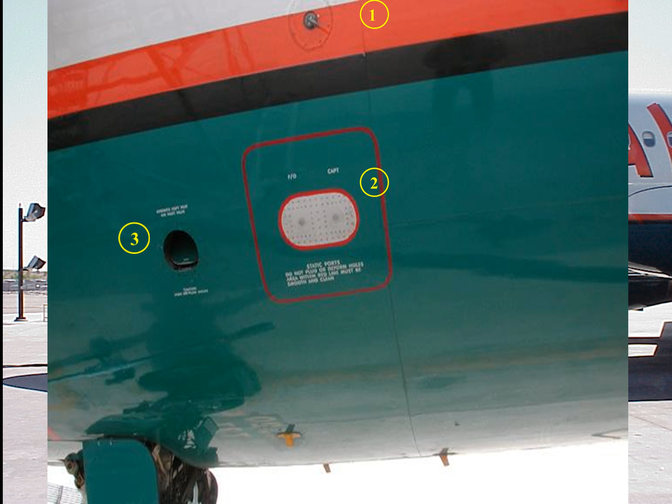One. AOA probes. Checked. Probes should be uncovered and damage-free. Captain and FO static ports.

Checked. Static ports should be clean and free of obstructions. Avionics ventilation air inlet valve. Checked. Door should be open and unobstructed if outside air temperature is greater than ground threshold 35 degrees to 55 degrees Fahrenheit. Otherwise, door should be flush with aircraft.

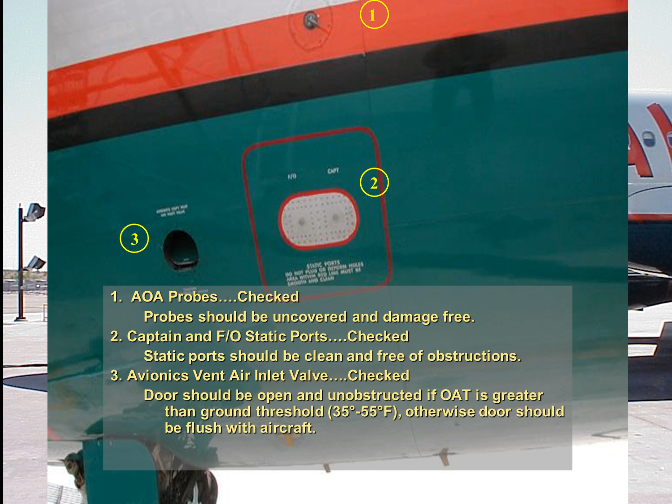Two. Oxygen bay door. Closed. Door should be closed and latched. Oxygen pressure relief disc. Checked. Check that the green disc is in place.

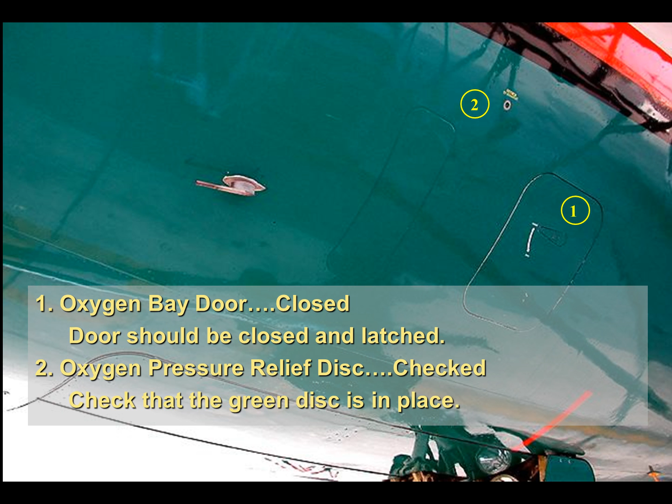Three. Pitot probes. Checked. Probes should be uncovered and damage-free. Total air temperature probes. Checked. Probes should be uncovered and damage-free.

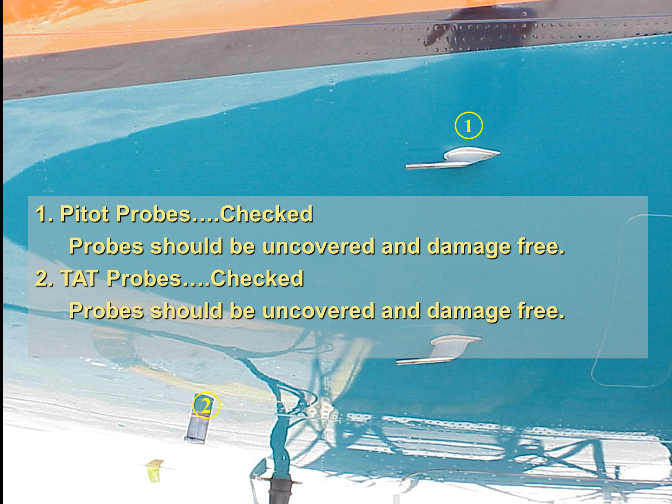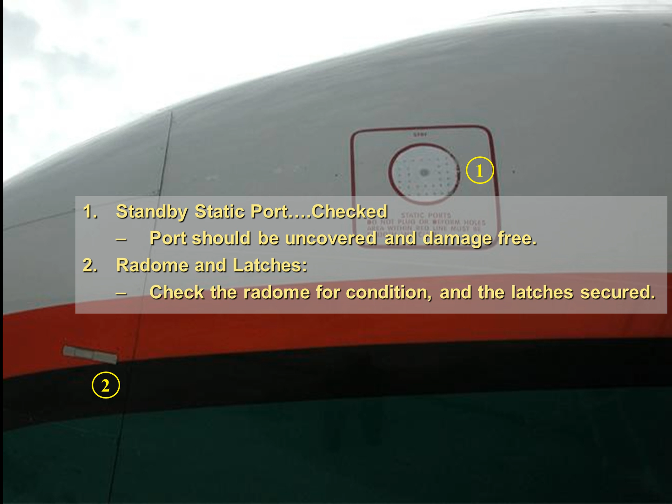Four. Standby static port. Checked. Port should be uncovered and damage-free. Radome and latches. Check the radome for condition, and the latches secured.

Five. DME number 1 antenna. Checked. Check condition and security. Nose avionics compartment door. Closed. The door should be closed and latched. External power door. Checked. Door should be secured if ground power is unavailable.

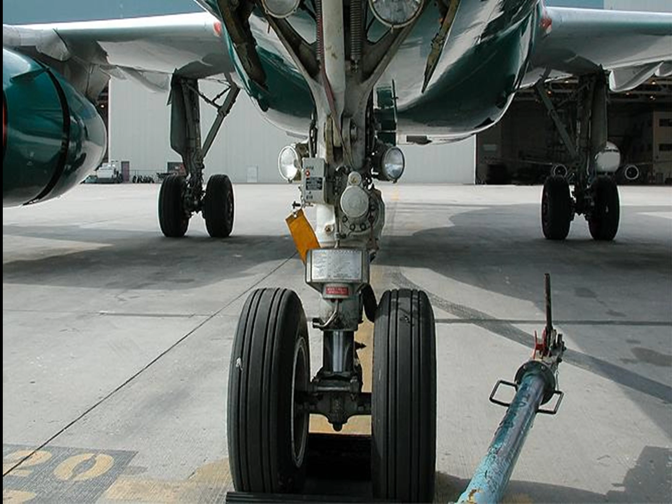Six. Chocks. In place. Brakes should be set if the airplane is unchocked. Wheels and tires. Checked. Check wheels and tires for condition. Although fabric may show, if tire cord is visible, contact maintenance. Taxi, takeoff lights. Checked. Check lenses for general condition and cleanliness.

Nose gear structure. Checked. Check for adequate strut inflation, general condition. There should be no apparent leaks. Runway turn-off lights. Checked. Check lenses for general condition and cleanliness.

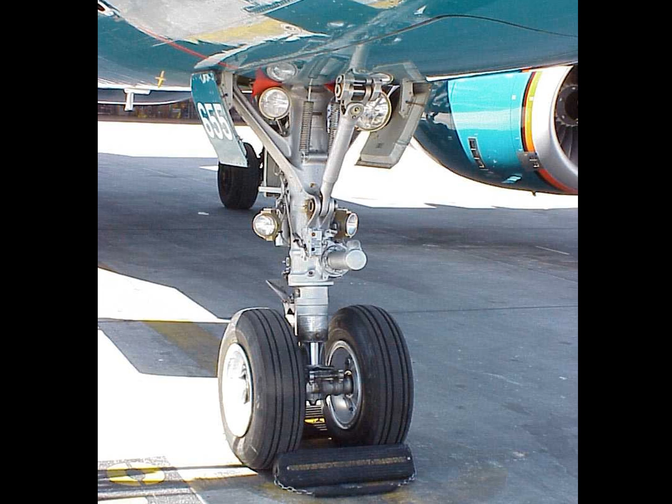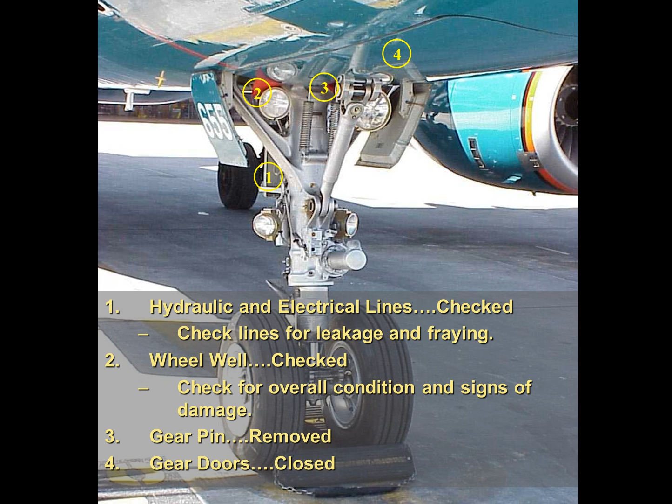Seven. Hydraulic and electrical lines. Checked. Check lines for leakage and fraying. Wheel well. Checked. Check for overall condition and signs of damage. Gear pin. Removed. Gear doors. Closed.

Eight. Forward avionics compartment door. Closed. Door should be closed and latched. Avionics ventilation air outlet valve. Checked. Door may be open or closed based on skin temperature threshold, same as the avionics ventilation inlet valve.

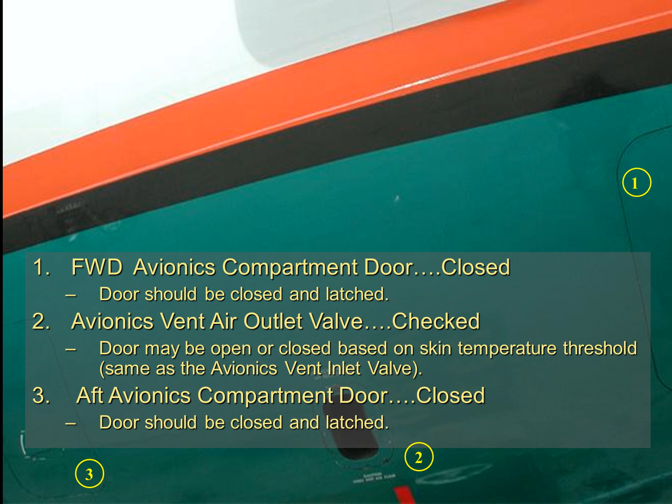Door should be open and unobstructed if outside air temperature is greater than ground threshold 35 degrees to 55 degrees Fahrenheit. Otherwise, door should be flush with aircraft. Aft avionics compartment door. Closed. Door should be closed and latched.

Nine. FO and captain static ports. Checked. Static ports should be clean and free of obstructions. Forward cargo door. Checked. If door is closed, handle should be flush with the door and the locking indicators showing green.

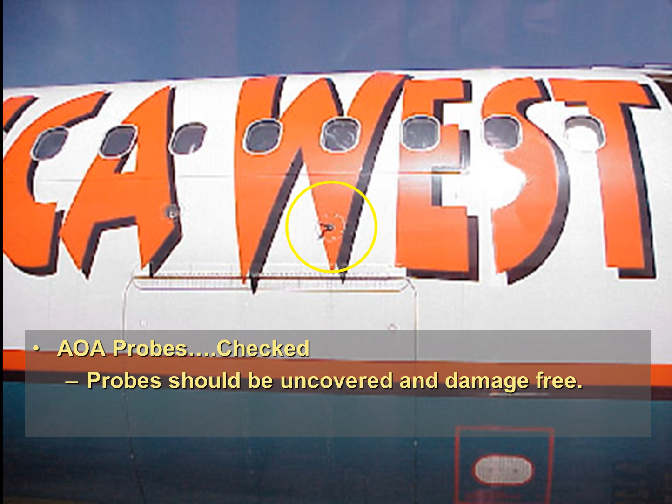Ten. AOA probes. Checked. Probes should be uncovered and damage-free.

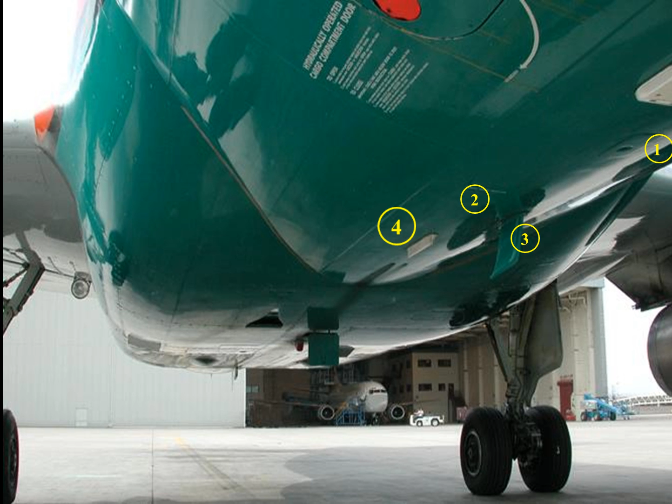Eleven. Antennas. Checked. Check condition and security of the transponders, and number 1 and number 2 DME antennas. Cargo door selector panel. Closed. Lavatory drain mast. Checked. Check the drain mast for damage and obstructions. Marker beacon antenna. Checked. Check condition and security.

Twelve. Emergency ram air inlet flap. Checked. High pressure ground connection door. Closed. The doors should be closed and latched. Low pressure conditioned air door. Closed. The door should be closed and latched.

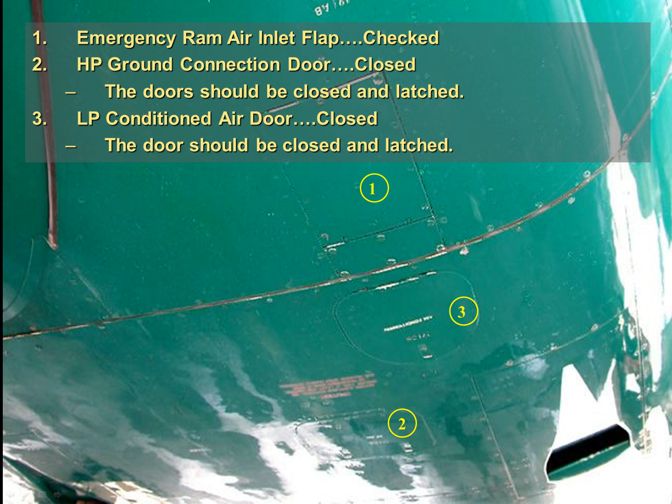Thirteen. Potable water drain door. Closed. Door should be closed and latched. Pack air intakes. Checked. Intakes should not be obstructed. Beacon light. Checked. Check that the light is flashing and that the lens is clean and damage-free. Overpressure panels. Secured.

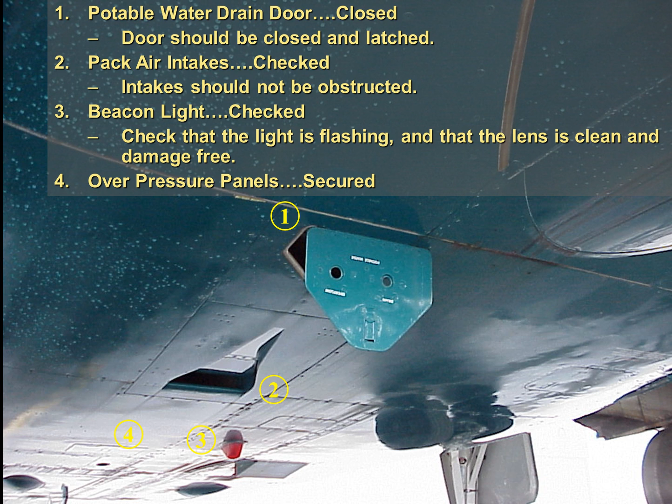Fourteen. Center fuel tank magnetic fuel level. Secured. The stick should be secure and flush with the fuselage. Center fuel tank leak monitor valve. Checked. Check for signs of leakage.

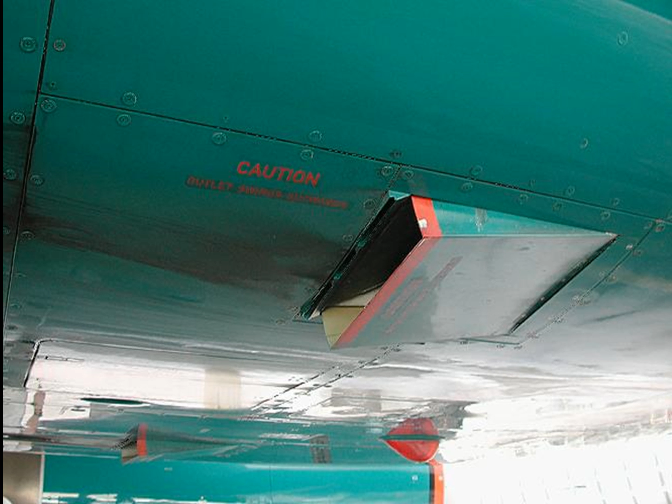Fifteen. Yellow hydraulic bay door. Closed. The door should be closed and latched. Pack air outlets. Checked. Outlets should not be obstructed.

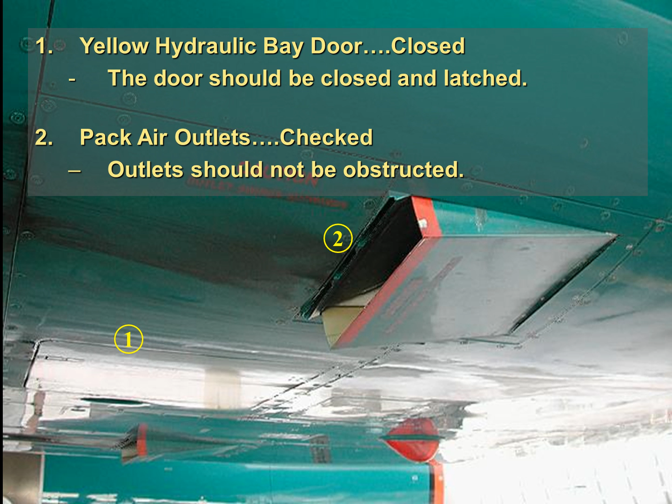Sixteen. Refueling control panel. Closed. The door should be closed and latched if not in use. Magnetic fuel level and water drain valve. Secured and checked. The sticks should be secure and flush with the wing. Check for signs of leakage. Landing light. Checked. The light should be retracted and the lens clean and undamaged.

Leading edge slat number 1. Checked. The slat should be retracted and free from damage or contamination.

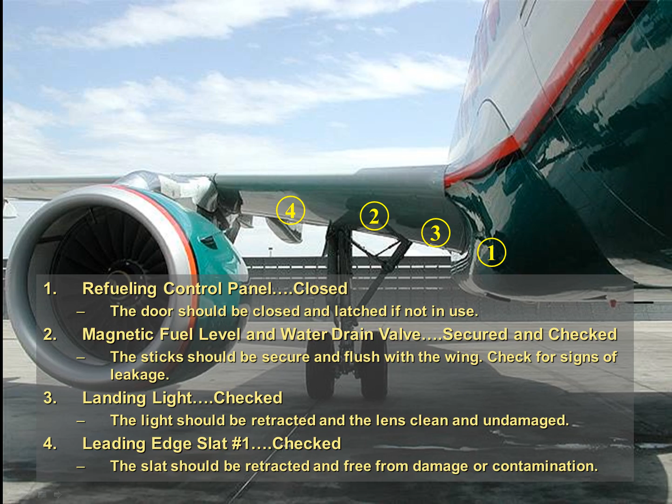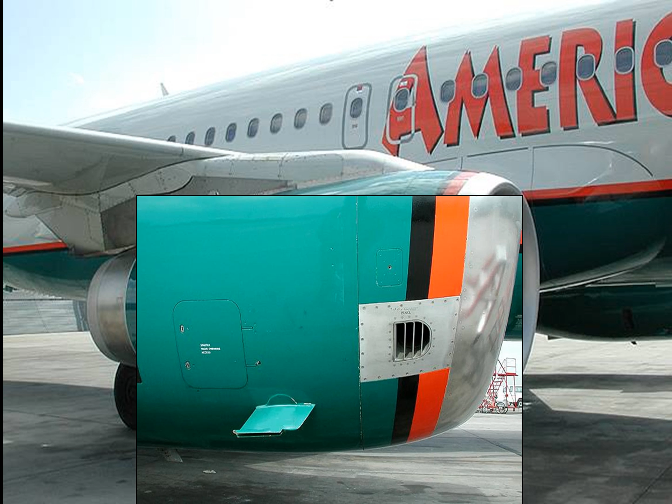19. Start valve access door. Closed. The door should be closed and locked. Engine pylon and access panel. Checked. Check the pylon for damage. The access panel should be closed and secured.

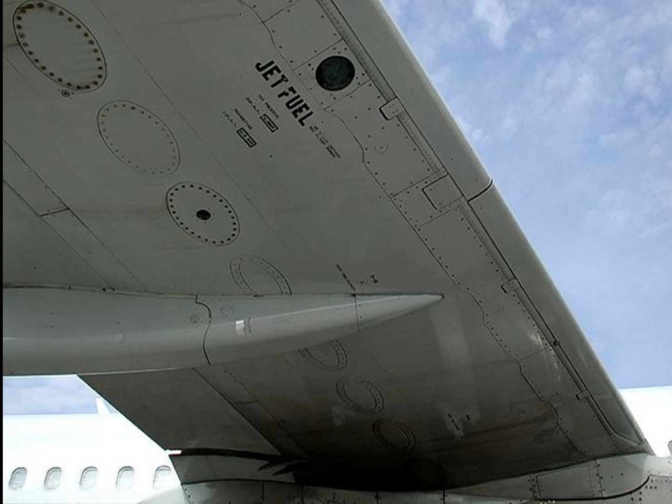20. Single point refueling cap. Closed. Cap should be secured if not in use. Wing tank overpressure indicator. Checked. Check the black disc with a white cross visible.

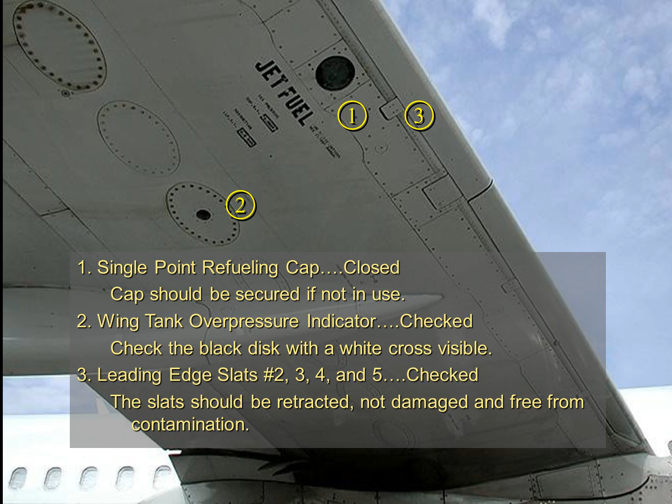Leading edge slats number 2, 3, 4, and 5. Checked. The slats should be retracted, not damaged and free from contamination.

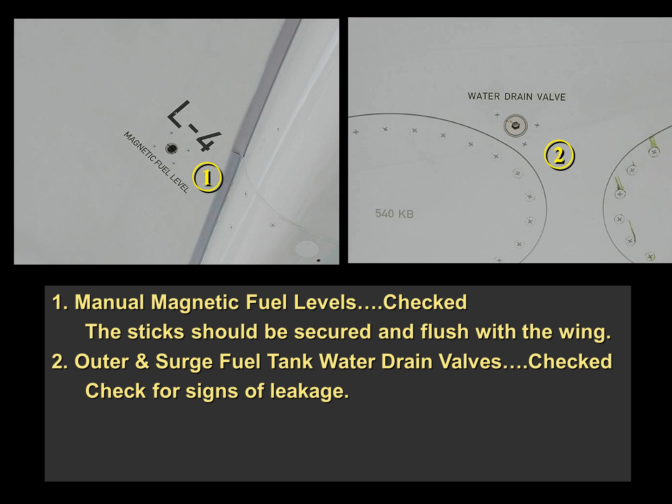21. Manual magnetic fuel levels. Checked. The sticks should be secured and flush with the wing. Outer and surge fuel tank water drain valves. Checked. Check for signs of leakage.

22. Surge tank air inlet NACA port. Checked. The inlet should not be obstructed. Surge tank overpressure indicator. Checked. Check the black disc with a white cross visible.

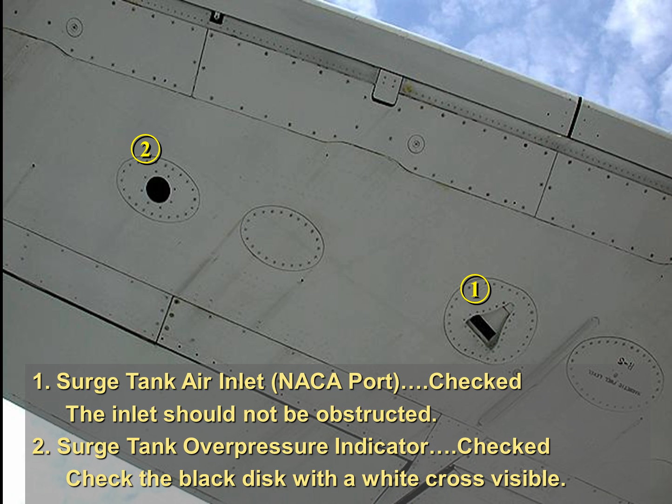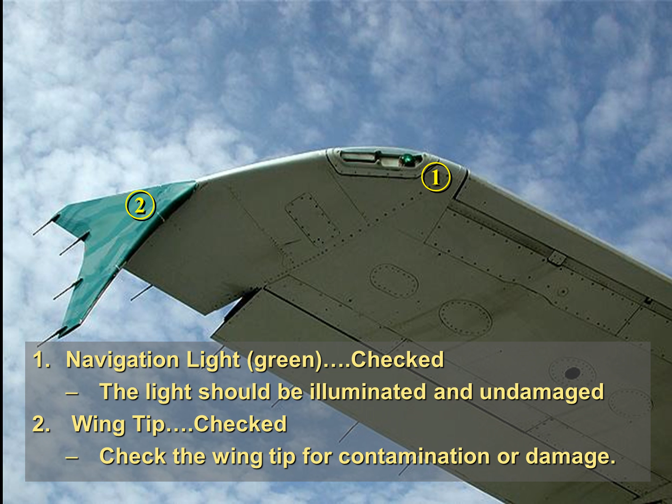23. Navigation light green. Checked. The light should be illuminated and undamaged. Wingtip. Checked. Check the wingtip for contamination or damage.

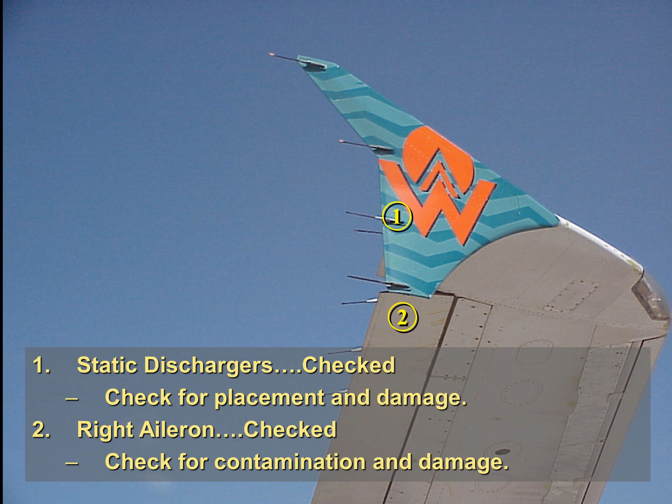24. Static dischargers. Checked. Check for placement and damage. Right aileron. Checked. Check for contamination and damage.

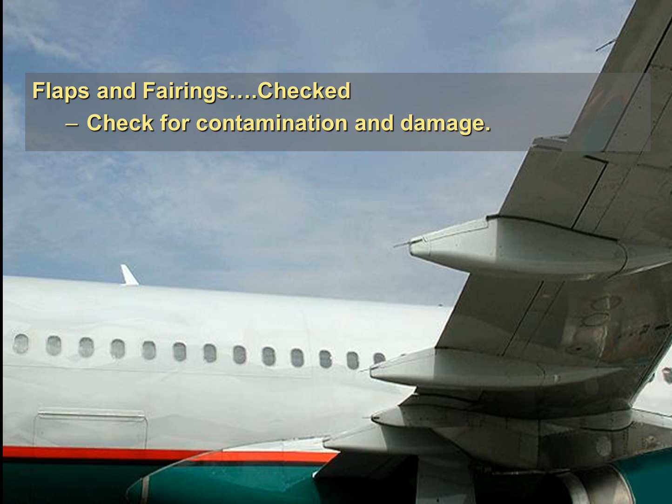25. Flaps and fairings. Checked. Check for contamination and damage.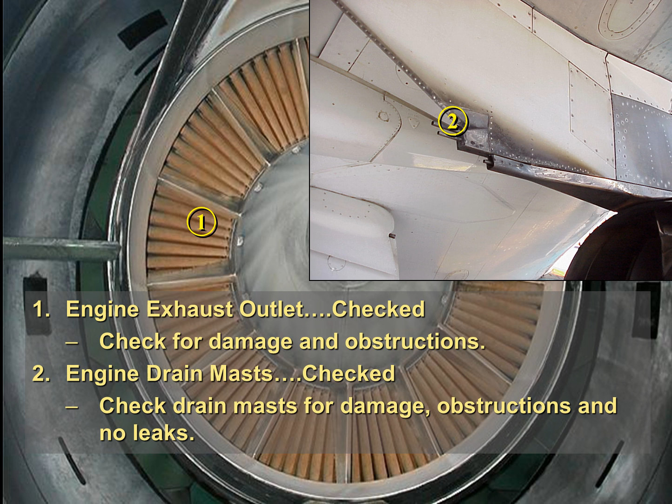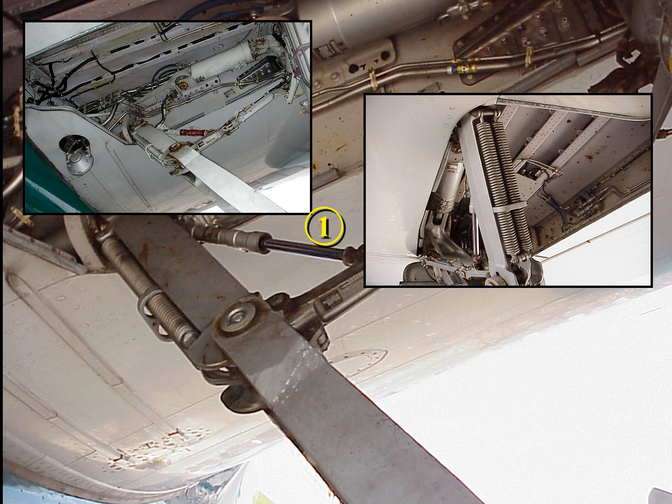28. Gear downlock. Removed. Downlock spring. Checked. Check for apparent damage.

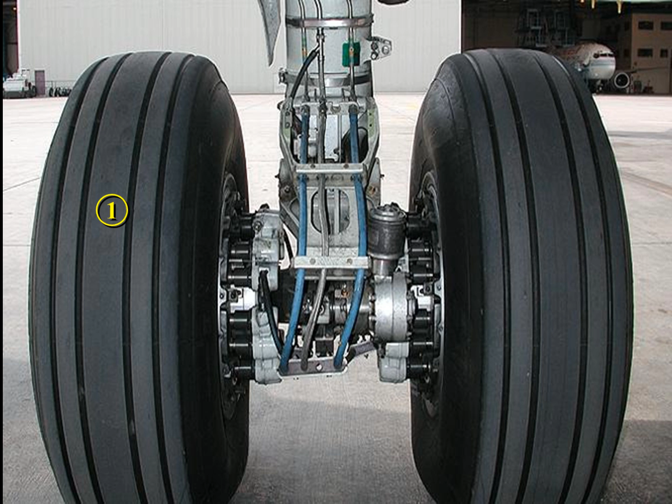29. Strut, tires and wheels. Checked. Check strut for leaks. Check lines, wheels and tires for general condition. Tire fabric may show, but if cord is showing, contact maintenance. Check for proper strut extension, some of the inner cylinder visible and no leaks.

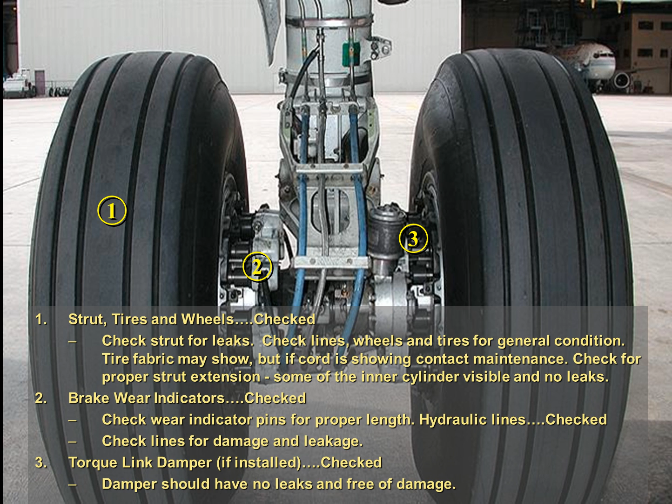Brake wear indicators. Checked. Check wear indicator pins for proper length. Hydraulic lines. Checked. Check lines for damage and leakage. Torque link damper, if installed. Checked. Damper should have no leaks and be free of damage.

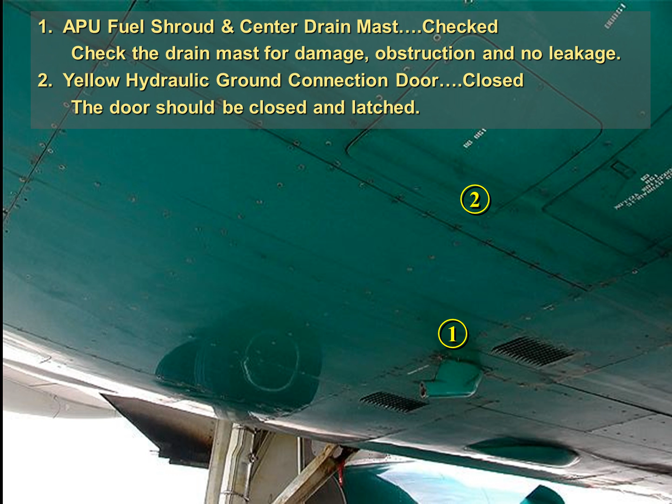30. APU fuel shroud and center drain mast. Checked. Check the drain mast for damage, obstruction and no leakage. Yellow hydraulic ground connection door. Closed. The door should be closed and latched.

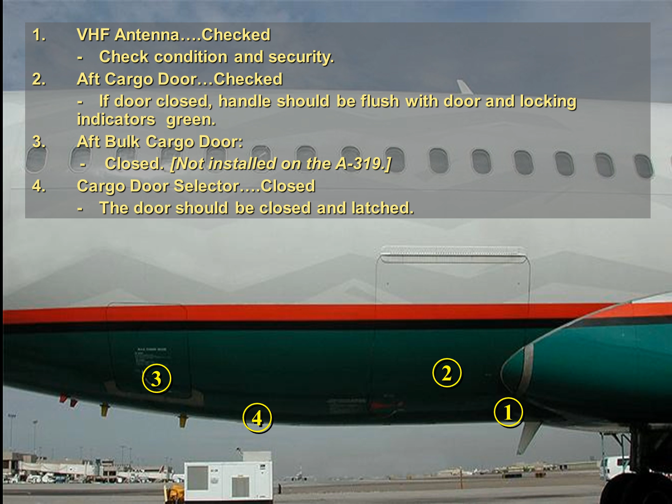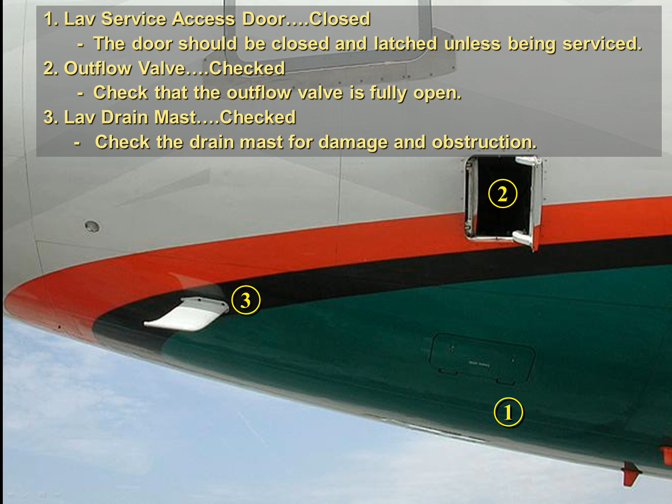32. Lavatory service access door. Closed. The door should be closed and latched unless being serviced. Outflow valve. Checked. Check that the outflow valve is fully open. Lavatory drain mast. Checked. Check the drain mast for damage and obstruction.

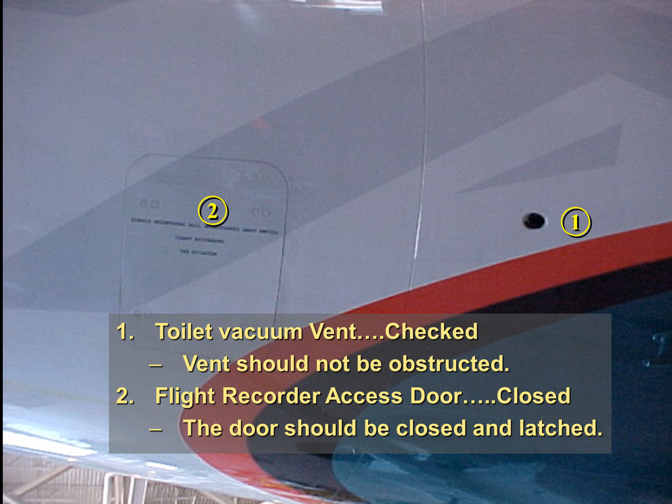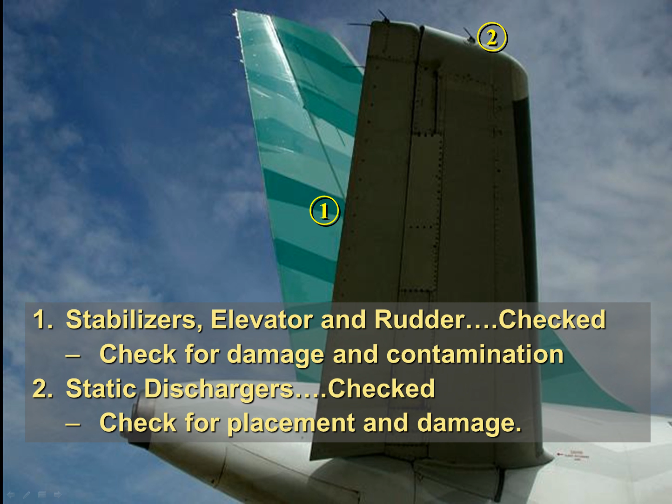34. Stabilizers, elevator, and rudder. Checked. Check for damage and contamination. Static dischargers. Checked. Check for placement and damage.

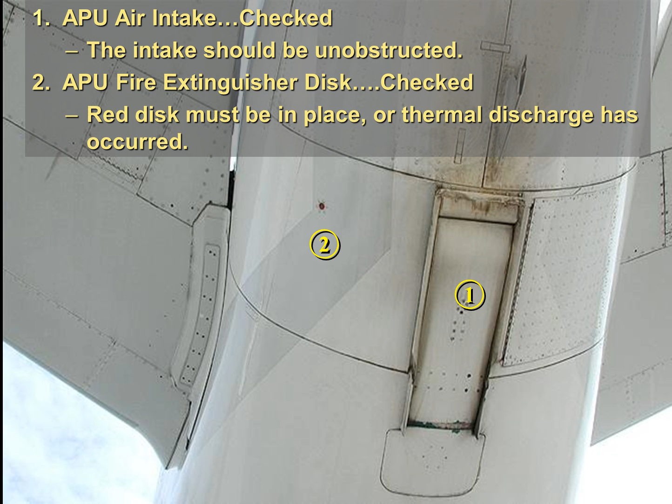36. APU air intake. Checked. The intake should be unobstructed. APU fire extinguisher disc. Checked. Red disc must be in place, or thermal discharge has occurred.

37. Stabilizer trim index. Check. Check that the stabilizer is within trim limits.

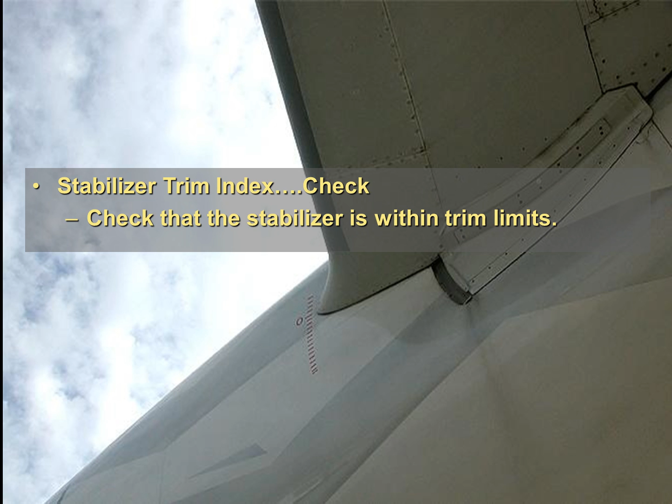38. Potable water service door. Closed. Door should be closed and latched.

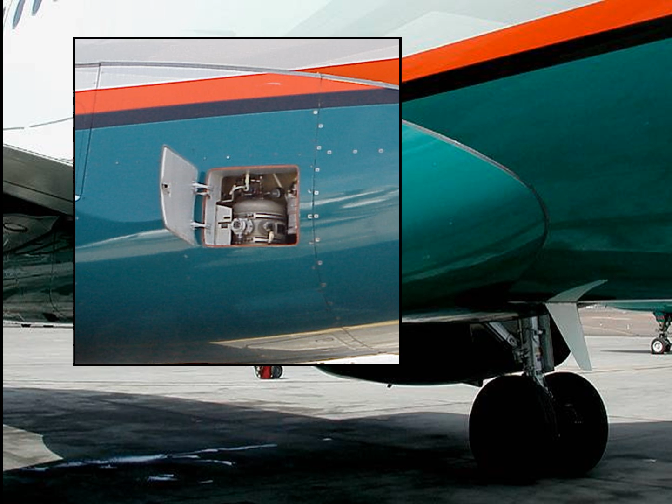39. Blue hydraulic connection door. Closed. The door should be closed and latched. Hydraulic service door. Closed. The door should be closed and latched. Blue hydraulic system reservoir door. Closed. The door should be closed and latched.

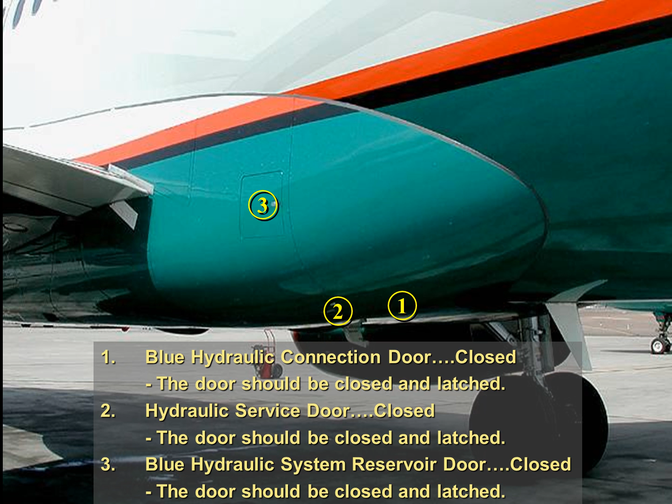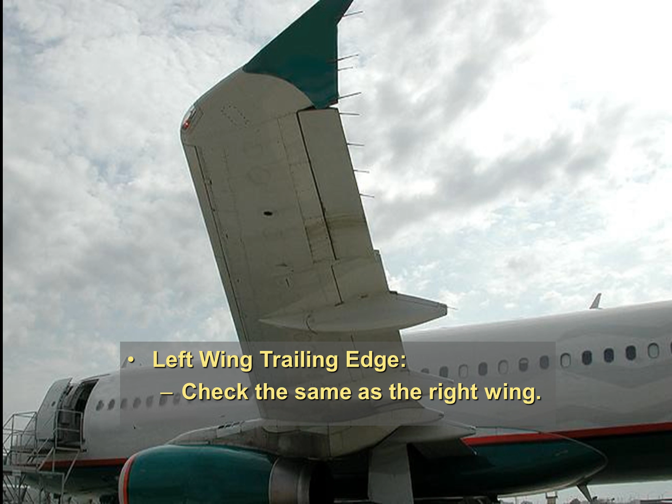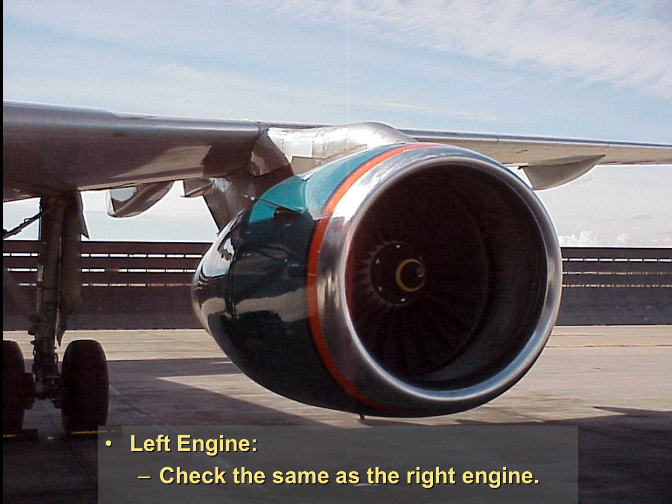40. Check left gear, as you did the right. 41. Left wing trailing edge. Check the same as the right wing. 42. Left wing leading edge. Check the same as the right wing. 43. Left engine. Check the same as the right engine.